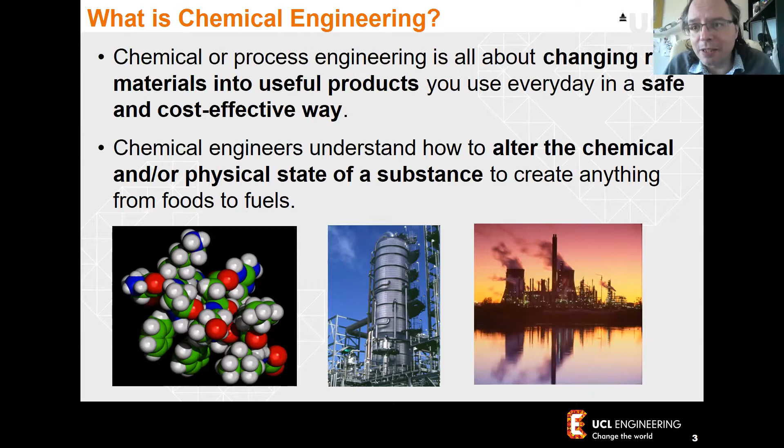The real difference between chemistry and chemical engineering, and this is a key point, is that the chemist usually tends to focus on the chemical transformation, and they develop novel materials and processes, analyzing substances, measuring the characteristics and physical properties of these substances. Chemical engineers really focus on turning these transformations and discoveries into products that are physically attainable.

Most importantly, we chemical engineers are not particularly interested in producing one gram of a substance. We are looking at the full production process, the process at the manufacturing scale. So really, we are looking at chemical plants where you can produce tons of a specific component, or of a mixture.

The other thing is we really focus on making these products for profit, on a scale that is accessible to the many. Because, as we said, these are the products we use in our everyday life. So the quantity is very important.

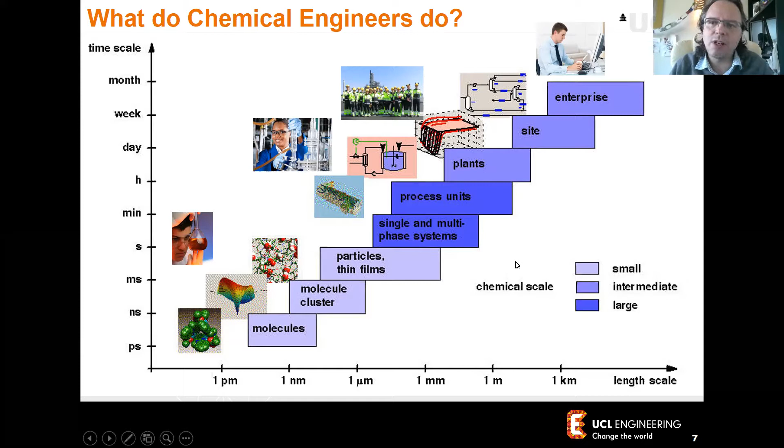When you take all these units together, you design the chemical plant. So we can operate at the level of the plant, but we can also go up the scale and try to manage, for example, all the refineries in a geographical region, and how these refineries interact with each other. This is a question of supply chain management, which is again chemical engineering. So pretty much all these scales are used in the investigation of phenomena in chemical engineering.

This is an example of a multi-scale approach, from the molecular scale to the actual plant. Here you are looking at a simulation - you can see these things moving. These are the molecules reacting on a catalytic surface.

A catalyst is a substance that facilitates the chemical reaction. As a chemical engineer, you need to understand how these molecules will attach to the surface - these are studies at the molecular scale, molecular simulation. But then you need to link this scale to the simulation of the actual reactor. You can optimize the operating conditions of these reactors, linking the molecular scale with the unit scale.

You need to validate these models that you develop at the reactor scale, and you execute experiments to do that. This might be done at the level of the lab. At the lab, you have a scale which might be very far from the actual chemical plant, so what you do is the so-called scale up of the process to reach the pilot plant.

We have pilot plants, which are plants in the middle between the lab scale and the plant scale. These are very important because they tell us how we can manage conditions and the process at a scale closer to that of the actual plant. So this is basically about moving from the molecular scale to the plant scale.

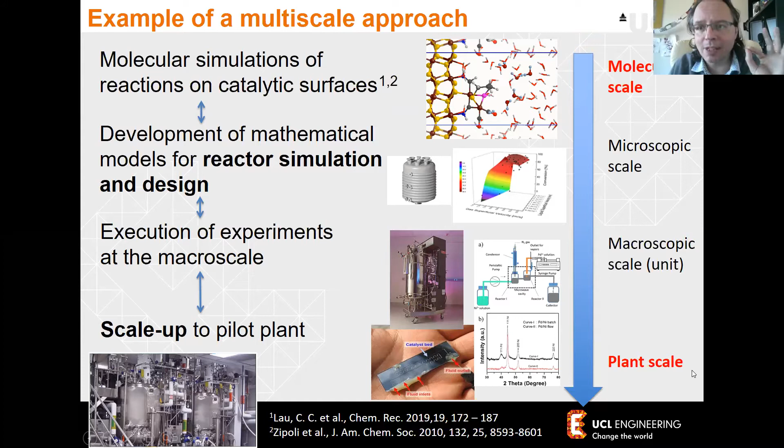This is actually unique in the UK, because usually they are grouped together. The reason why at UCL they're not grouped together is that in that case we would have a very, very big department - incredibly big. So from the point of view of management and ensuring quality, it was decided to split into two different things. Chemical engineering focuses on chemical processes, while biochemical engineering focuses more on processes using biochemical entities or bioprocesses.

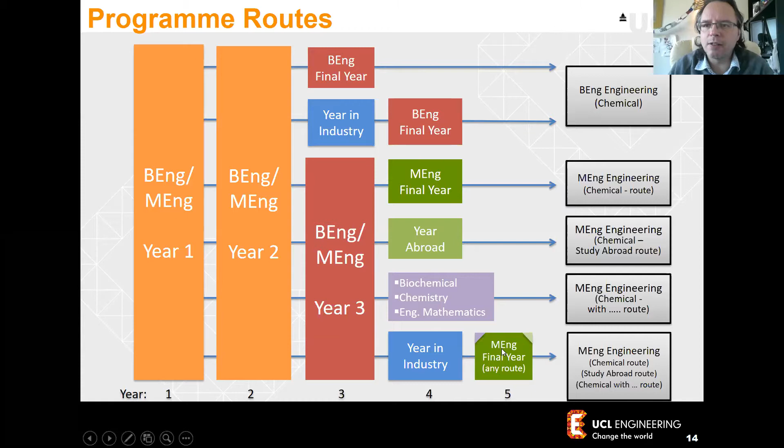Another option is to spend your 4th year abroad at another university, or switch to another route like biochemical, chemistry, or engineering mathematics. Or you can spend your 4th year in industry, ending up with a 5-year MEng program. You could, in theory, also combine the year in industry and the year abroad - again your final year would be abroad at another university. That's also possible.

What are these universities? We have a number in the US, including MIT, Purdue, Wisconsin, Georgia Tech, and Columbia, among others. The important thing is that our study abroad year is really part of the MEng degree, so it's fully accredited by IChemE. This is very important, because we need to ensure that when you go abroad, the quality and standards are basically the same or higher than those at UCL.

We also have universities in Australia, like Sydney or Melbourne, and many others in Europe, including France, the Netherlands, Italy - actually where I come from, University of Padua - Germany, Greece, and Spain. So quite a lot of universities.

About the year in industry - we have an industrial advisory board which helps us shape our teaching program. They provide guidance for the year in industry, help with finding placements, and help us organize career events, workshops, and sessions on how to write a CV and shape your interview skills. Some of the employers include GSK, ExxonMobil, Nestle, Air Products, and more. So we have a very strong link with industry, both for teaching and research.

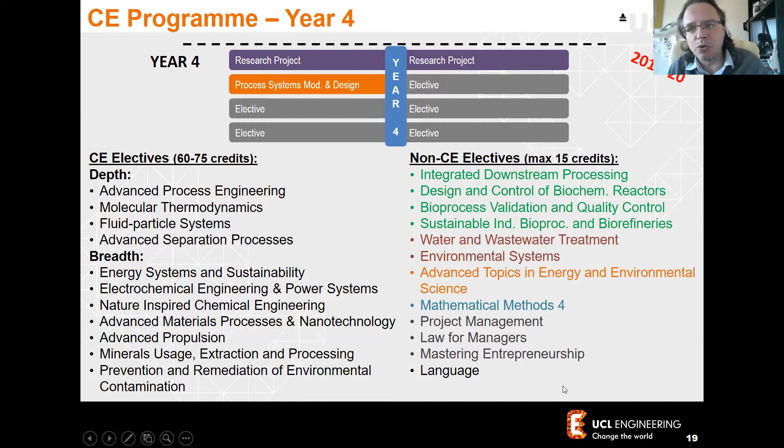So the integrated engineering program, what is this IEP? This is a very advanced program where you have basically a cross-disciplinary platform where students really tackle real-world problems working with other engineering disciplines. They work together using research to develop technical and team working skills, and these are skills required not only by academia but also by industry. So key aspects of this IEP are: challenges, scenarios, how to change the world, and minors.

Let's take a look at some of them. Challenges are two major 5-week integrated design challenges. These are in year 1, term 1, the very first beginning of your study at UCL. You work together with students from other engineering disciplines, maybe electrical, civil, mechanical, to formulate, design and verify a strategy for the production of a vaccine. As you can see, this is very much relevant to what we are living today with COVID - can we actually work together to develop a vaccine?

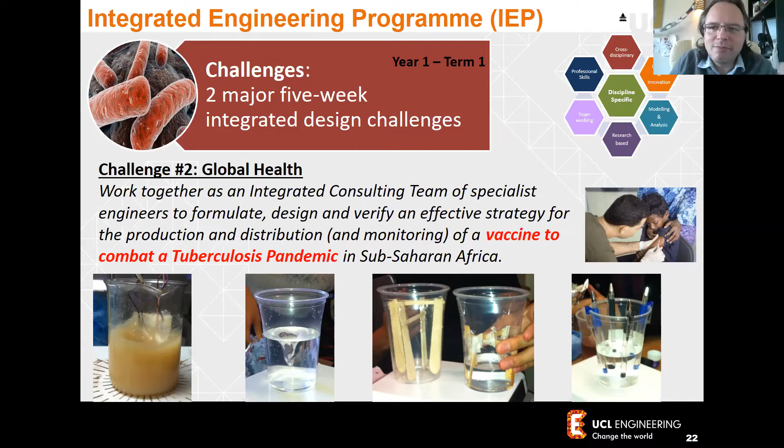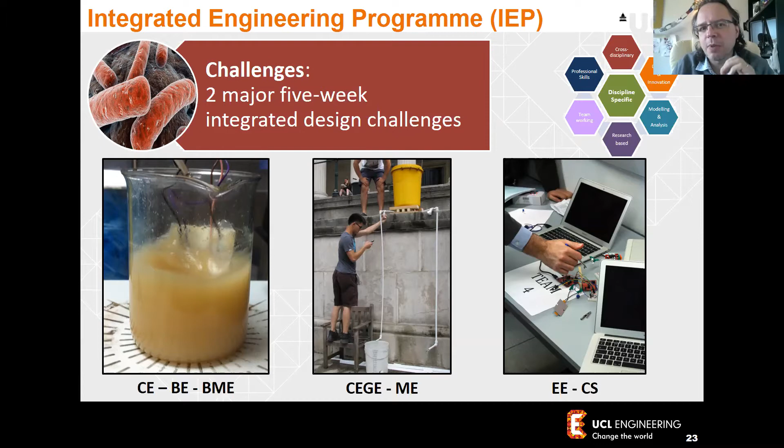In this case, it's a vaccine to combat a tuberculosis pandemic in Africa, but still the kind of tools and methods you're using are relevant to the world we are living in. You have interaction with other engineering disciplines because, together with the transformation - which is a bioprocess - you work together with biochemical engineering, and you need civil and mechanical engineering because you have parts in movement, and electrical engineering because you need to control and monitor this process. This is really a bioprocess where you have microorganisms actually operating this transformation. So students really work in groups together with students of other engineering disciplines to tackle this very important key problem.

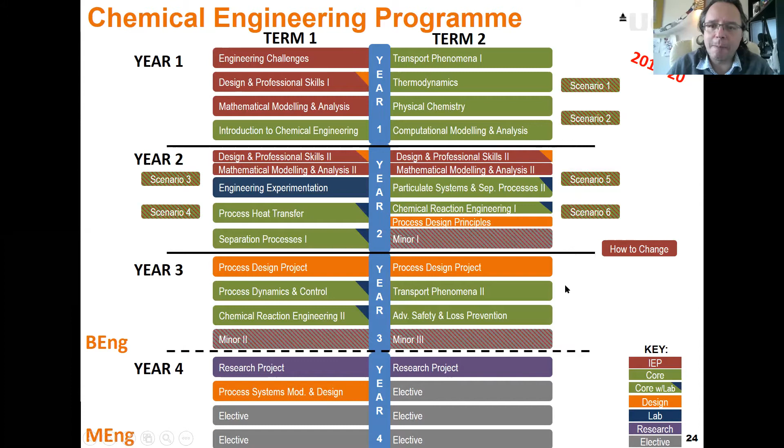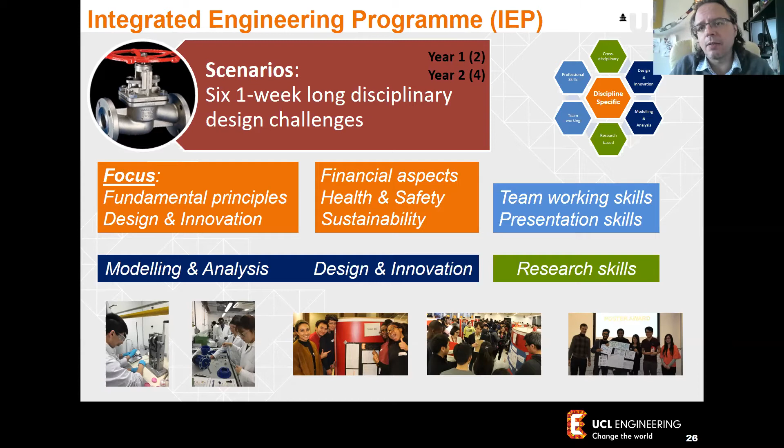Then you have scenarios, and how to change the world, and the minors in second and third year. The scenarios are really 6 one-week-long disciplinary design challenges. They can be focused on principles, design aspects, finance, sustainability, and they specifically target your research skills, your presentation and team working skills. Again, you work together with other students.

Scenarios may be on chemicals, so really process plant design. They can be related to energy, for example transportation, natural gas and liquefaction, or biofuels. Or they can be related to separation of air, or other things related to cross-sector or pharma applications.

Let's see an example from pharma. In this case, the students were asked to actually assess the viability of a formulation and creating a tablet - you have an API, and then you have excipients, but how do we formulate this? This is very important. The students studied in the lab how to create the tablet, how to optimize the formulation, and they ended up with a technical report and also a creative presentation.

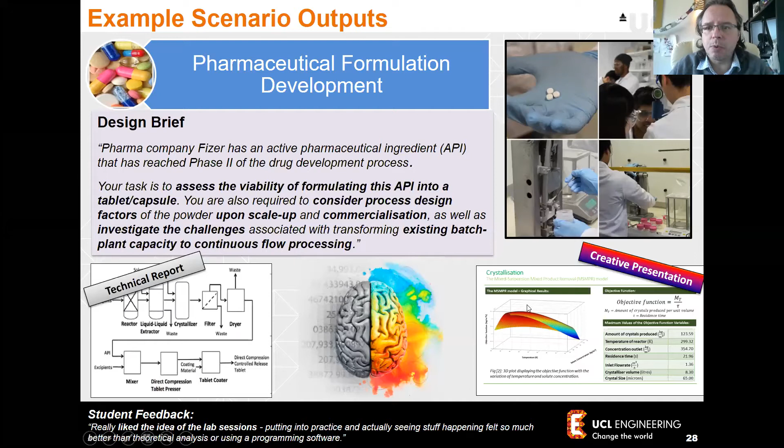Minors - so what are these IEP minors? These are 3 modules that you can pick up within a different or interdisciplinary area. For example, let's say you have an interest in applied chemistry, or you want to learn a little bit more about chemistry - you can pick up 3 modules related to advanced chemistry. The same can be done in other topics like environmental engineering, finance. If you like machine learning, you can have one in intelligent systems. If you like programming, you can have one on programming.

Then you can have electives - remember, in the 4th year with MEng - so you can have, for example, environmental science, nanotechnology.

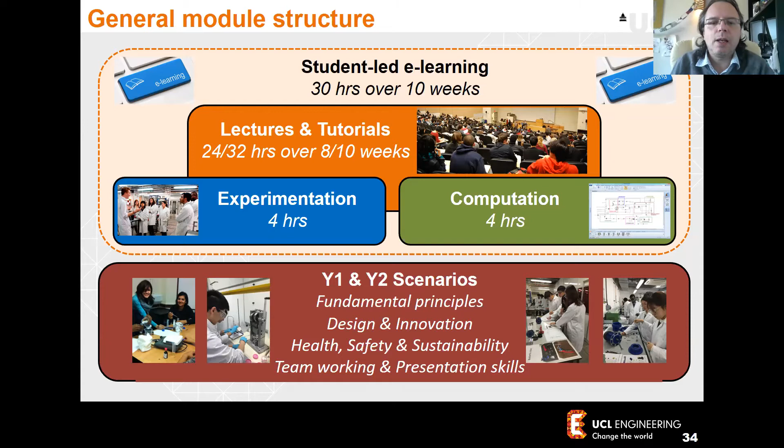Safety is also very important, and it is present in a number of modules that we are teaching, starting from year 1 and 2, with the scenarios and the design and professional skills 1 and 2. Then you actually study safety with a capstone design project, the 1-year-long design project I mentioned earlier. And also you have a full module on safety and loss prevention, focusing on quantitative risk management, which is very, very important.

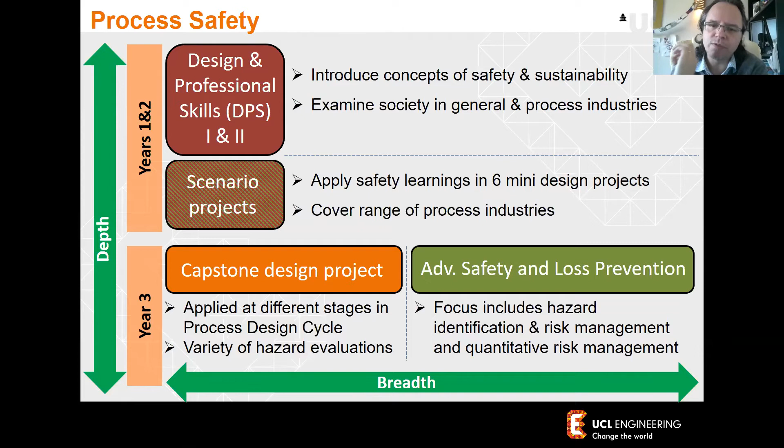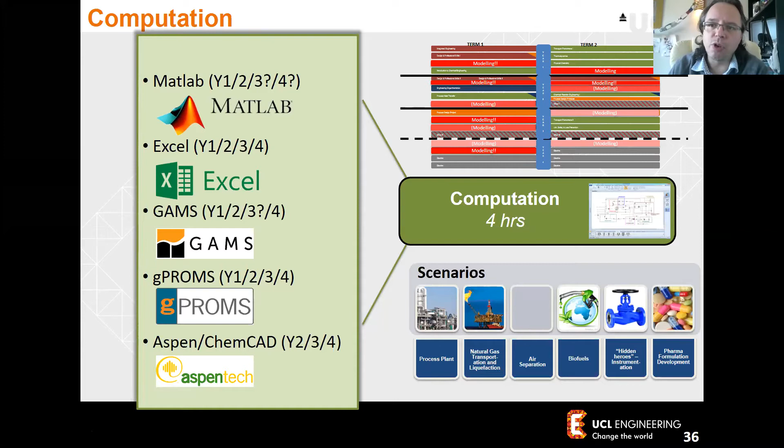Computation is present across the whole program, together with the most standard tools like MATLAB and Excel. We teach the use of GAMS, gPROMS, and Aspen, which are state-of-the-art software for simulation and optimization. So these are very, very important.

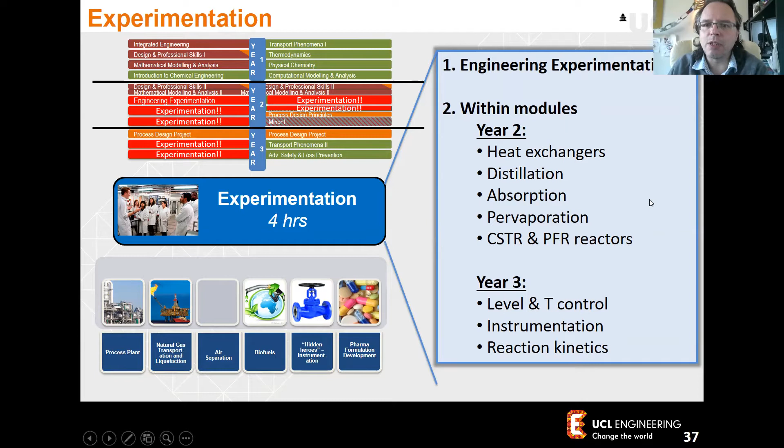And then we have also experimentation, one full module from the very beginning. Then we have also elements of experimentation in year 2 and year 3 in various modules.

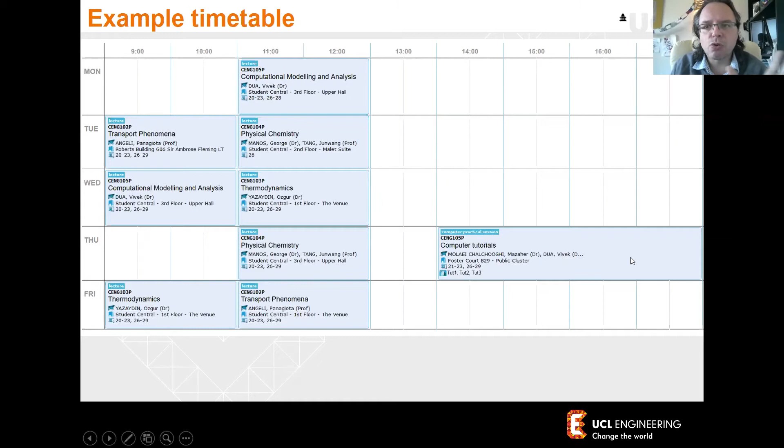Example of a timetable. Usually students have lectures in the morning, 9 to 1. And they have tutorials that can be computer tutorials or lab tutorials in the afternoon. So this is usually the distribution of lectures.

We use a lot the virtual learning environment, so Moodle, where we share material, where we interact with students, where we get feedback from students, and where we also mark some of the students' work.

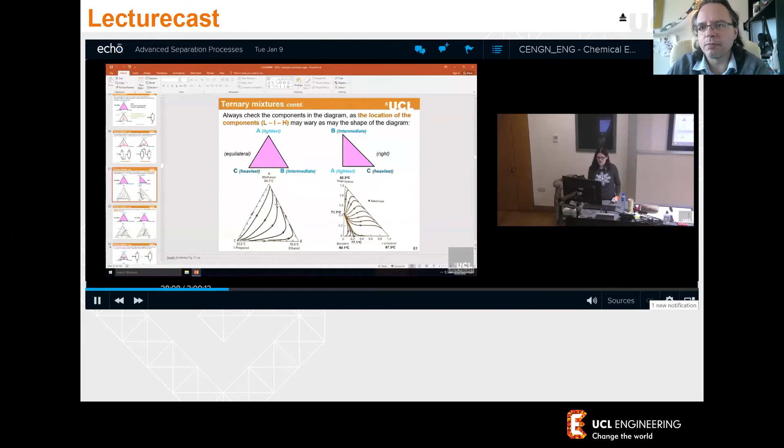We also use quite a lot the Lecturecast, particularly now that we are in this situation of pandemic, we're using a lot the recorded lectures. It looks something like that - you have slides and the lecturer on the right. You can also see the various aspects, and this is very interesting because if students cannot attend the actual session, you can always go back on Moodle and look at the recording. So that's very important.

We use a lot now with the pandemic, the remote teaching, of course, as most of the universities. We use Zoom quite a lot, this tool also for teaching, Teams for tutorials or one-to-one meetings, Moodle and Lecturecast, really for the availability of these lectures.

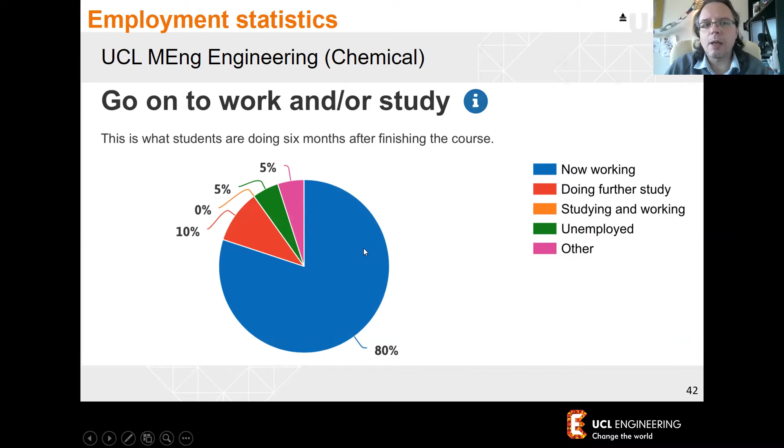In terms of statistics of our program, we have very, very good statistics because 6 months after finishing the course, 80% of the students are working. 10% are doing further study, it might be MSc or PhD. And also, in terms of employment, 6 months after the course, 95% of our students are in a professional or managerial job. So it's a very, very high percentage.

We also ask for English language certification, from GCSE, English language and maths a grade C or 5. For UK students, you also need to have a grade C or 5 in a foreign language. This is what we require.

And also we have the equivalent entry requirements for the IB diploma: 38 total points, with 18 points in 3 higher level subjects, including math and chemistry, with no score lower than 5, and again the third subject.